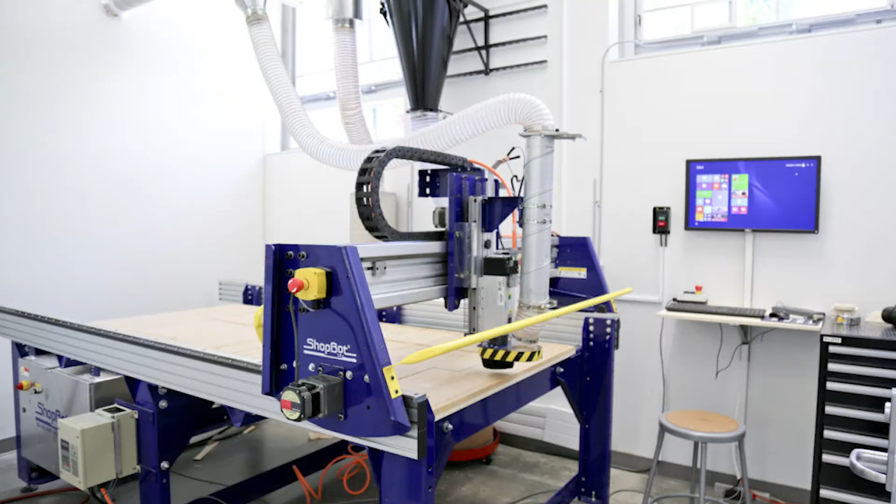Today we'll be going over submission guidelines for parts produced on our Shopbot, a 3-axis CNC router used for 2 and 2.5 dimensional subtractive machining operations in woods, plastics, and foam. This video does not cover the full range of tool pathing options available to you in CAM, nor does it cover machine operation training. Both of those topics will be addressed in other videos.

What we will talk about includes the machine's capabilities, the materials we currently stock, and materials we're willing to cut, some DFM considerations for your part, setting up your CAM files, and procedure for submitting your files through JPS.

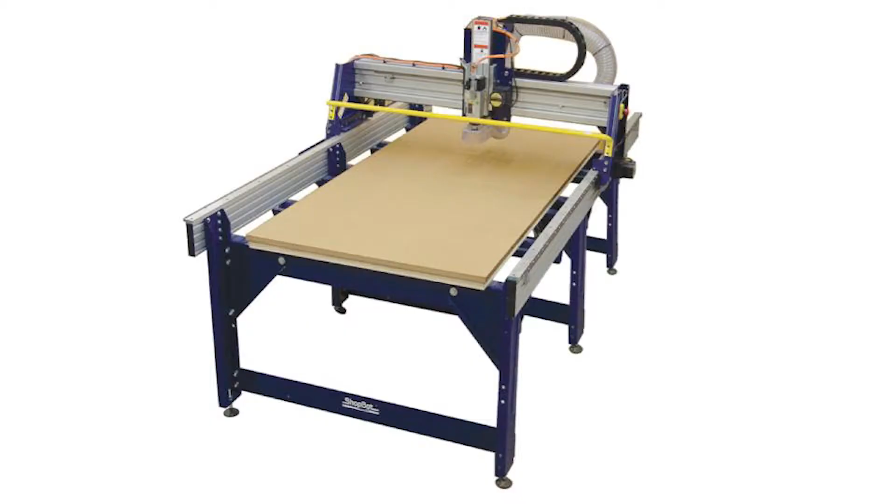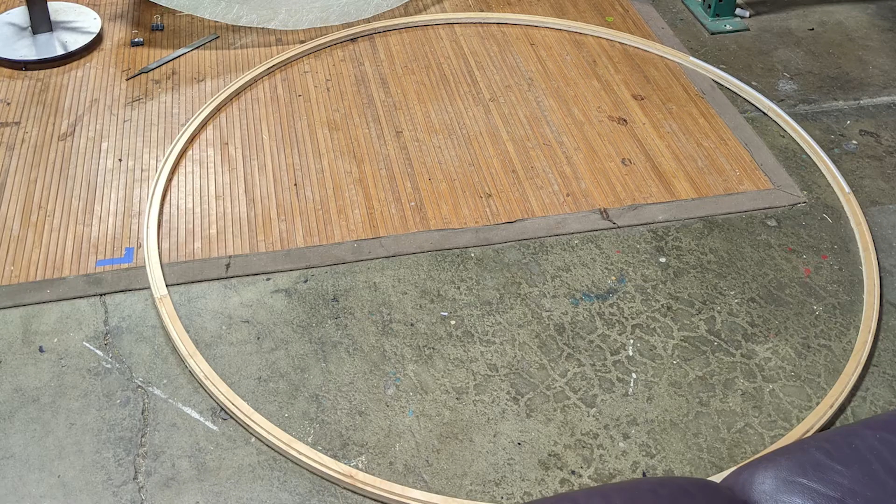The Shopbot PRS Alpha 9648 has a build envelope of 96 inches by 48 inches by 6 inches, meaning any part that exceeds those dimensions must be broken into several parts that can be assembled separately. The 6-inch height constraint is additionally a little more complex than it initially seems and could more accurately be described as a combination of values that include the end mill length required to machine your deepest pockets and the maximum height of your part that must be preserved.

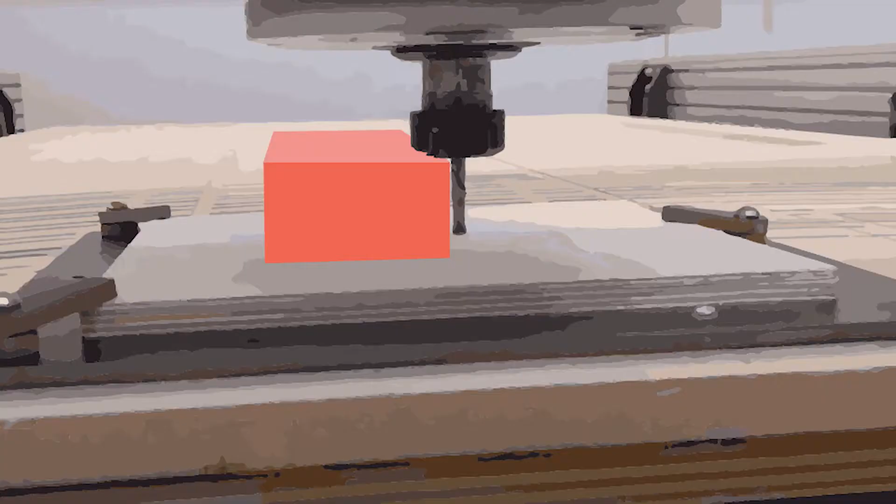A 6-inch maximum, for example, assumes that your part can be machined using one of our shortest end mills. If you have a dramatic 5-inch pocket, say, and need to use a long tool to machine the full depth, the tool must be able to retract 5+ inches to clear the part on its way to another operation.

If you aren't sure whether or not your part's geometry is possible to achieve using the Shopbot, schedule time with a design specialist on our website. When in doubt, and if you are able, give yourself some clearance on the height, width, and length of your stock so you don't need to fight with any of the machine's hard limit switches during fabrication.

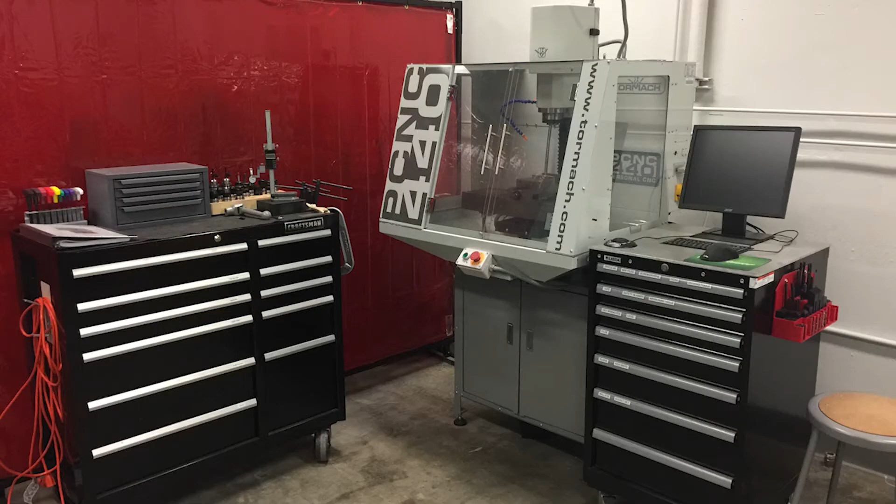Our Shopbot is capable of machining most materials softer than aluminum, primarily wood, including plywood, machinable plastics, and foams. If you're looking to make a part out of metal, check out our JPS submission process for the Tormach, or consider a flat or bendable part made on the FabLight laser cutter.

The Shopbot spindle speed runs up to 18,000 RPM, and the top cutting speed is 600 IPM, inches per minute. Although for most woods, we run it slower, between 100 and 200 inches per minute. We currently stock 2 thicknesses of unfinished plywood, and you can buy quarter, half, and full sheets of nominally 3/4 inch and nominally 1/2 inch ply.

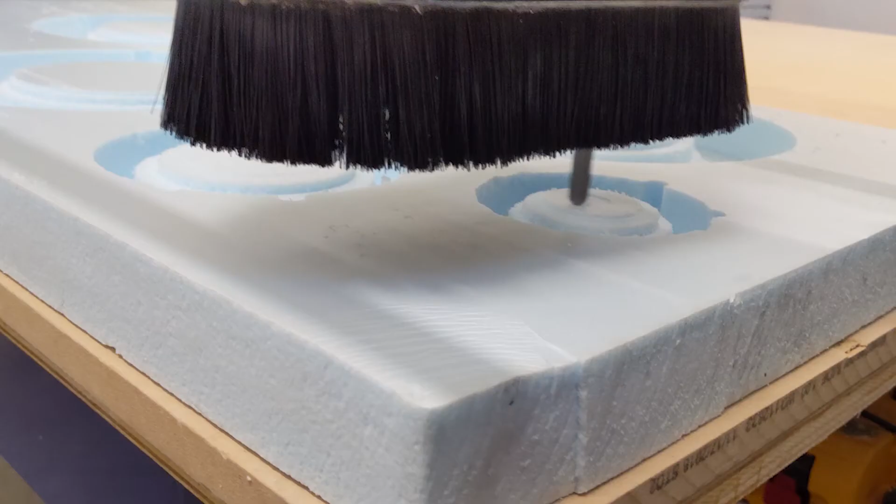These materials are good for flat pack furniture, large rigid structures, and laying up multiple sheets to make 2.5 dimensional shapes, i.e. shapes with no undercuts. We also stock 2 foot by 4 foot by 2 inch sheets of XPS foam, which can be good for looks-like mock-ups and scale models.

At the moment, the only plastics we have in stock that are especially good for machining come from our Othermill catalog and are limited to 4 inches by 5 inches by 1/4 inch, but we're willing to accept and machine most plastics that can be safely and successfully milled.

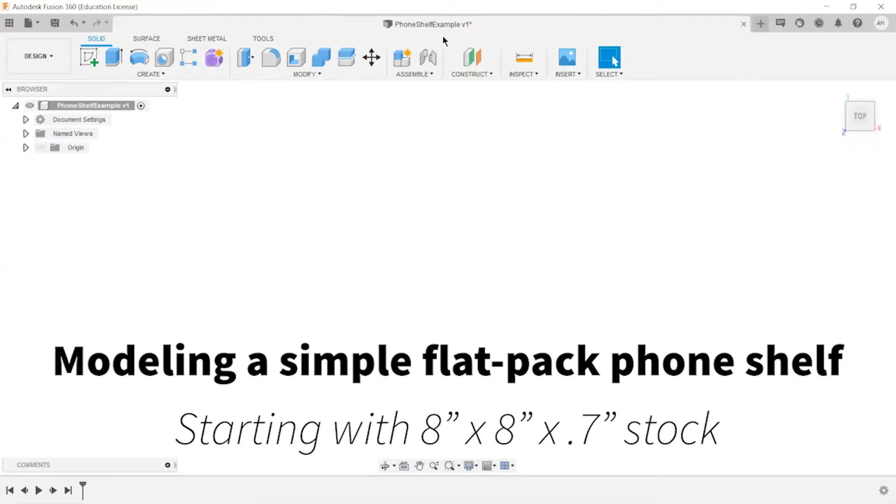Let's jump into Fusion and talk a little about some design for manufacturability considerations for CNC'd parts. We do process our CAM toolpaths using Fusion 360, so if you're designing in SolidWorks or Rhino, please export your part as a STEP file, load it into Fusion 360, which is free with an educational license, and prepare your CAM files as follows in this tutorial.

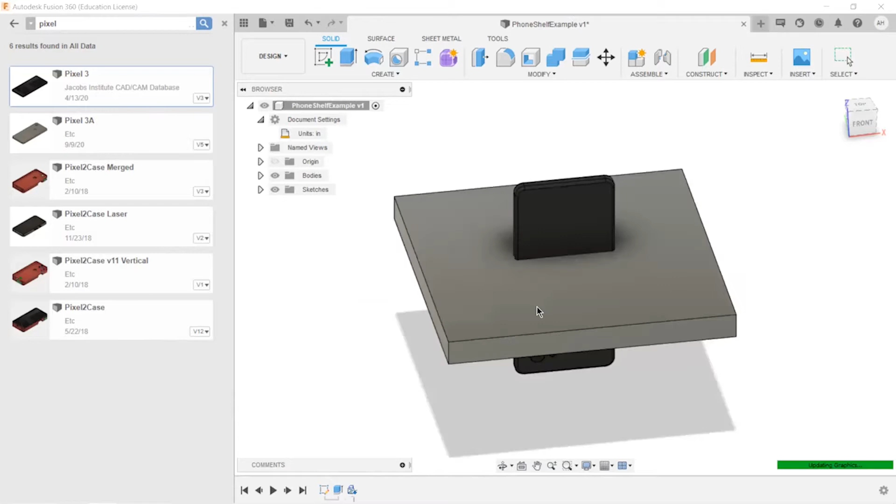First and most obviously, your part needs to be possible to machine from either a single direction, or you need to provide a workflow for flipping the part. If you're new to CAM, we definitely recommend you stick to machining your part from a single side, although machining 2 or more sided parts is technically possible.

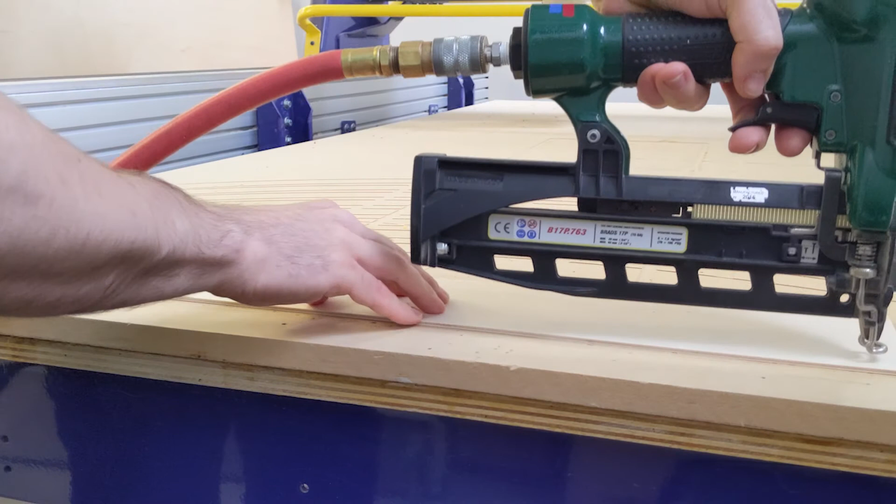Consider also how you plan to hold down your part. For work holding, we use screws, brackets, and sometimes double-sided tape in cases where our cuts are very light or low to the spoil board. Make sure you consider how your part will be held down and avoid trying to machine a part from stock that is too close to the size of the part to be adequately secured.

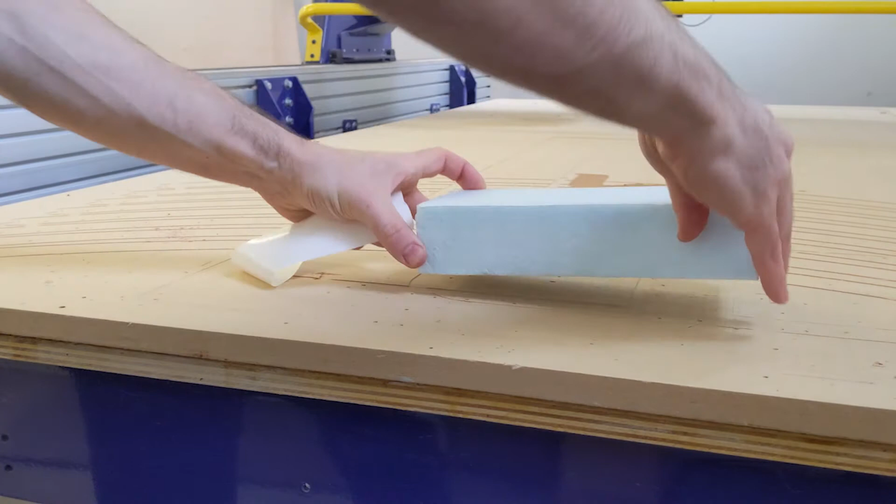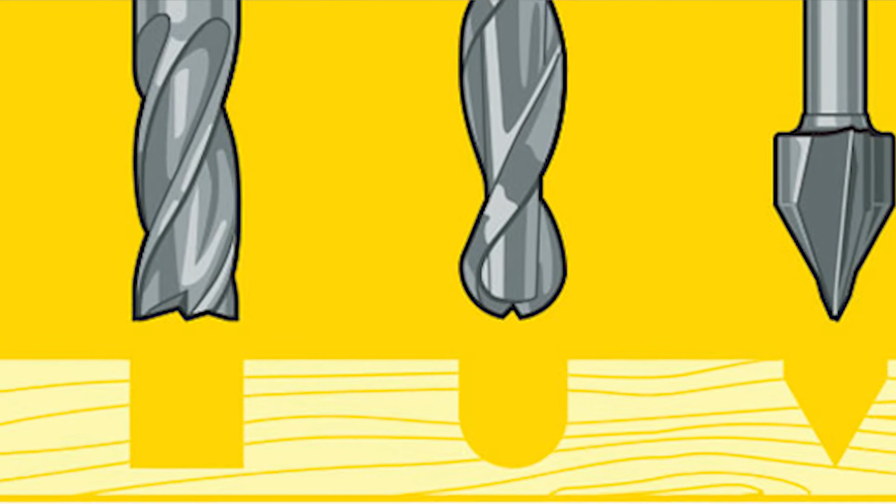End mills. Our end mills range in size from 1/2 inch to 1/8 of an inch and use either a flat or a ball profile. Flat is good for clearing out material and cutting around the edges of your part. Ball is better for detailed work and cleaning up curved faces, but isn't able to create right angles inside corner

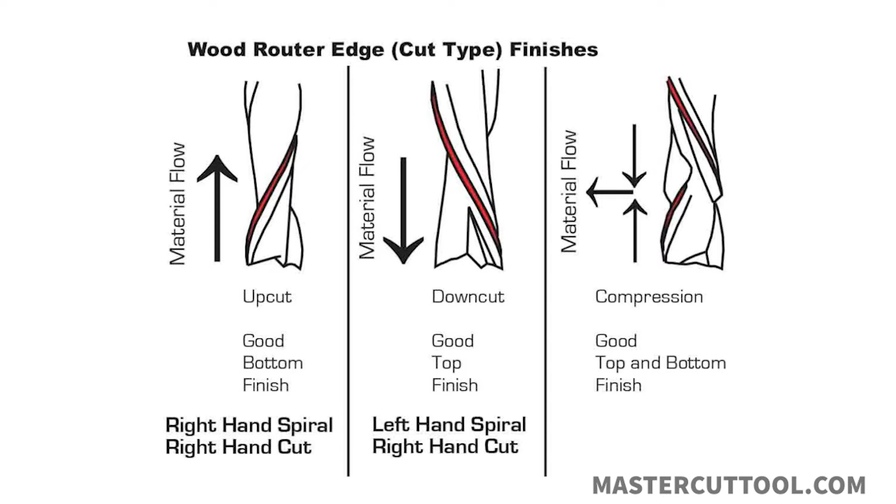pockets. We also stock upcut, downcut, and compression end mills, which are each good for limiting tear out on the top or bottom of your part depending on the cut. We usually choose these for you, but if you have a preference, you're free to note it in your README file.

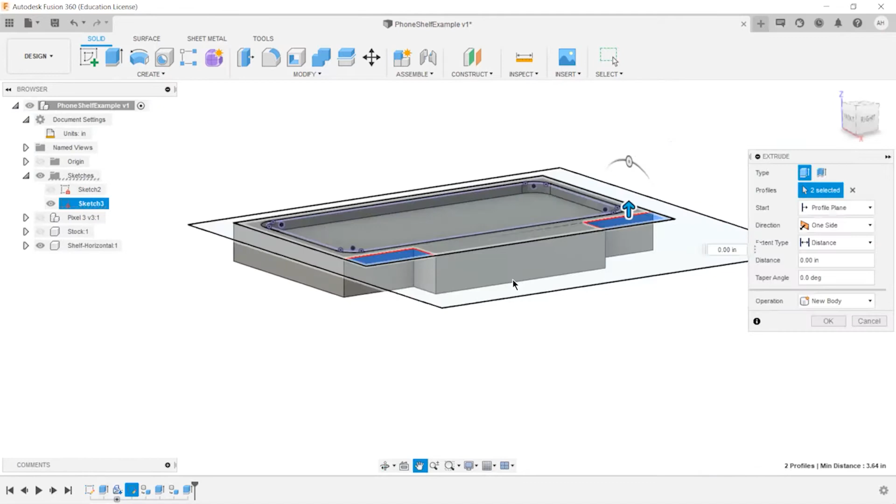We won't talk much about CAD in this video, but you want to be sure that your part is machinable and as organized as possible before sharing it with our design specialist staff. Before exporting, try to hide irrelevant components and only feature the part you wish to machine in the orientation you wish to machine it in.

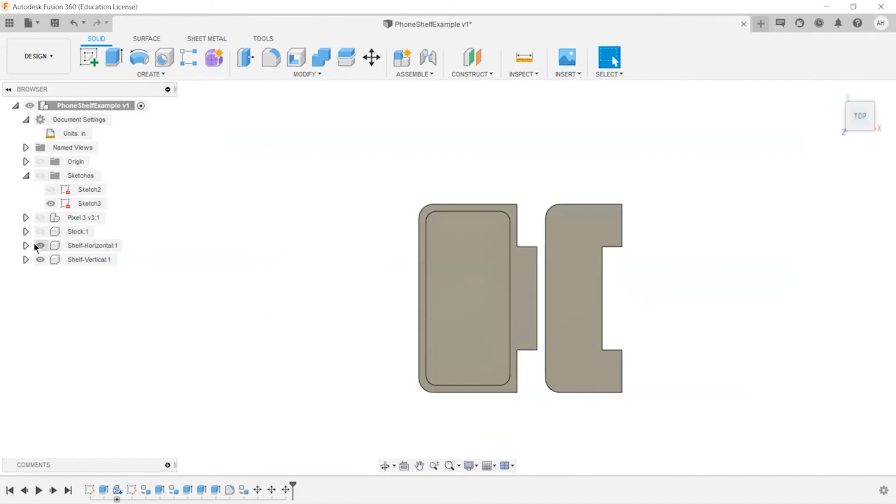Before exporting, however, please set up your CAM to the best of your ability. We will, in some cases, agree to help you generate the CAM file from your CAD design, but we would rather do this during a scheduled meeting than try to make assumptions about the kind of resolution and tools you'd like to use for your part.

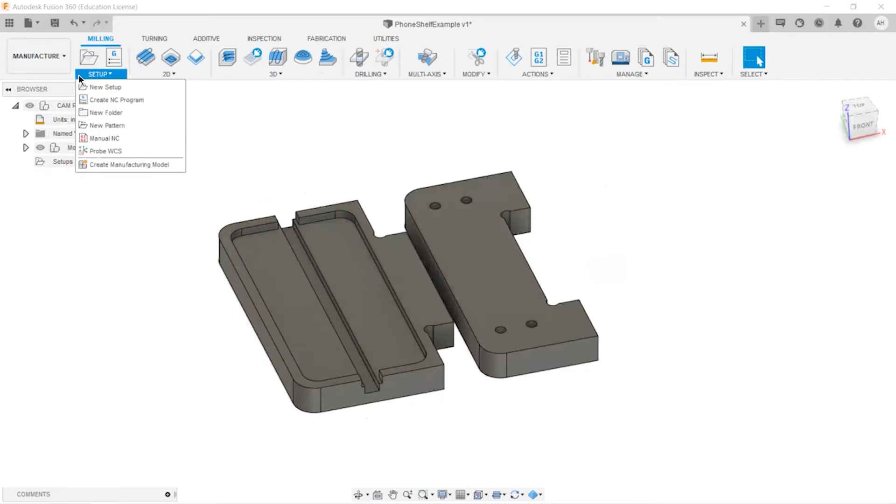Create a setup for your part. In your setup, specify the orientation of your part by selecting the following work coordinate system and choosing the proper axes. On the Shopbot, the longest dimension is the y-axis. The dimension perpendicular to that is the x-axis, and the vertical dimension is the z-axis.

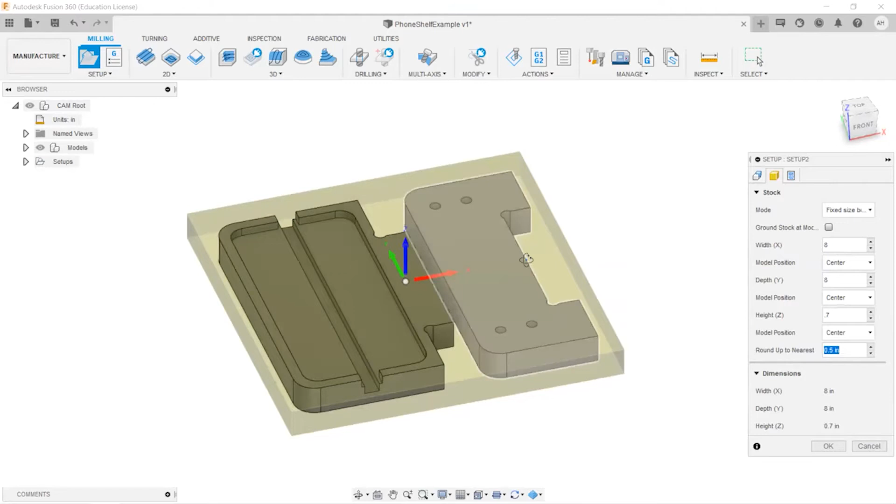If you're buying materials from the Jacobs store, set up your stock dimensions as fixed and include the actual thickness of the material you're buying. For length and width, you can just give us your part size plus 1.5 inches on those two sides. If you're supplying your own material, give us the exact full dimensions of the stock and position your part within it using the included controls.

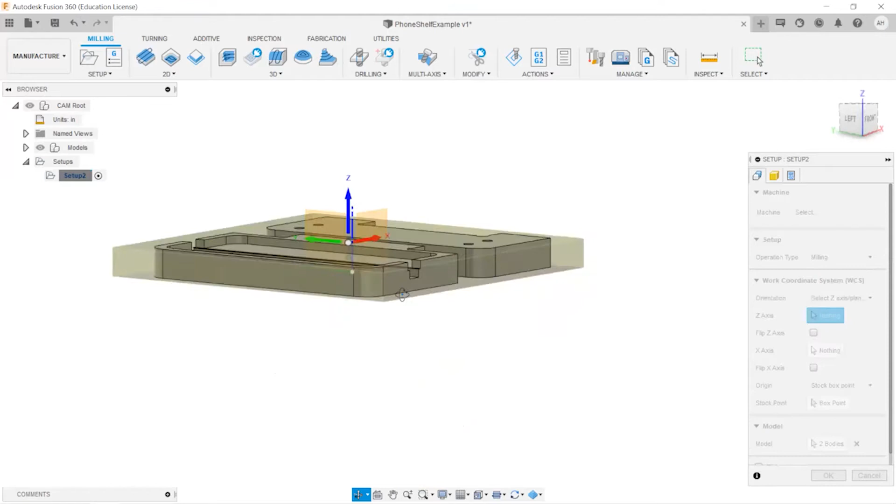Go back to the first tab and set your stock box point. It's common to reference your Z off of a corner closest to the spoil board if you intend to face your stock to a specific thickness, or if you have multiple operations that will change the height of the top surface. We also tend to reference off of the corner closest to the Shopbot computer by convention, unless you have a good reason to do otherwise.

Select a tool for your first operation. This will often be an adaptive clearing pass that uses the largest possible flat end mill, 1/2 inch, and select the maximum depth of cut appropriate for your material.

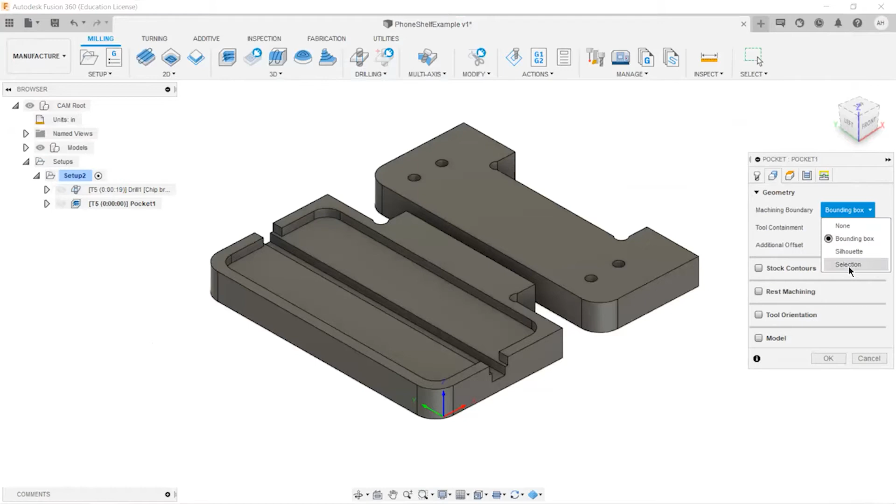Continue to add operations as appropriate. A typical part may include a few adaptive clearing passes with progressively smaller end mills, and then if there are contours or curves, a few passes with ball end mills, and finally a cutout 2D contour pass with a large flat end mill around the edge of your part. For more information on CAM, check out our written CAM guide here.

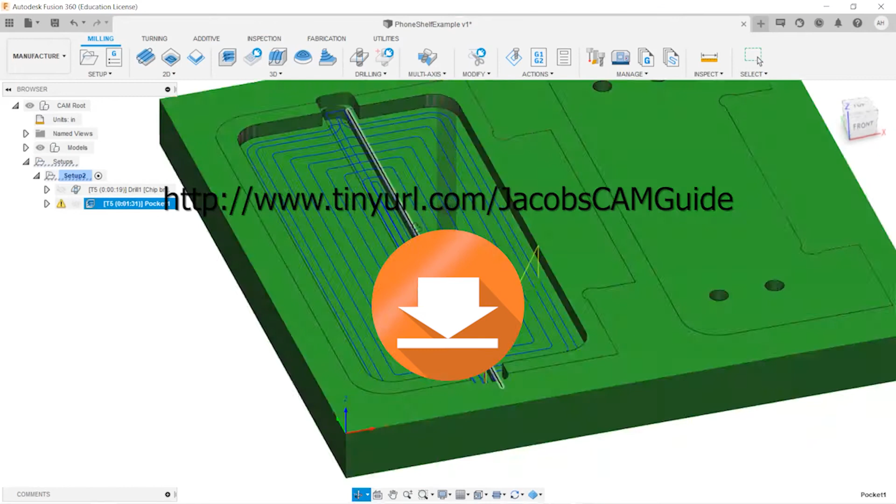Once you're done with your setup, simulate it to make sure you're not seeing any collisions and that the final results of the simulation look as you intend. Once you've simulated your CAM and are happy with your results, export your F3D file by going to File, Export, and selecting F3D to your desktop.

If your part includes subassemblies that are linked to other files, Fusion will ask you to save it as an F3Z, or zip file. We prefer that you take the time to break any links that exist and save as a simple F3D file. You'll also submit a readme.txt file that includes relevant information about your part.

The more information, the better, including the expected use of the part, work holding preferences, desired resolution of finish, and the overall expected dimensions, including units. If you have any other drawings or photos that would be helpful, please include those as well. All of this information can be submitted through our JPS portal found at jps.jacobshall.org.